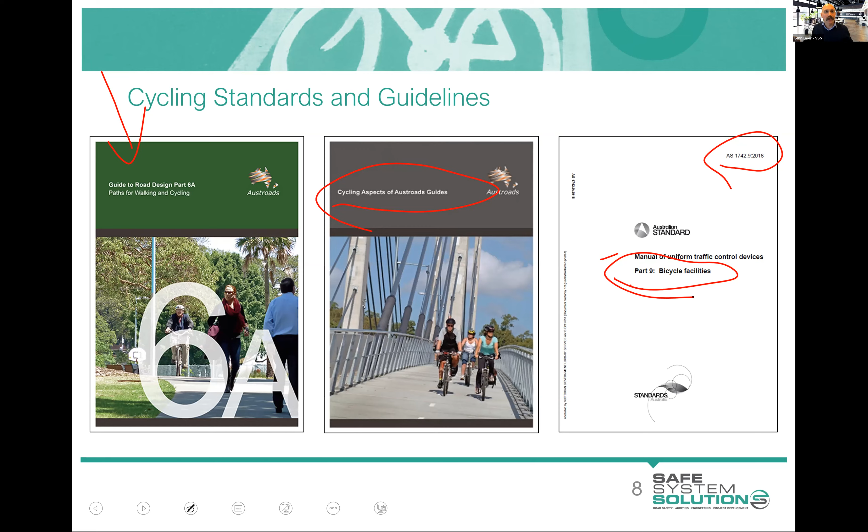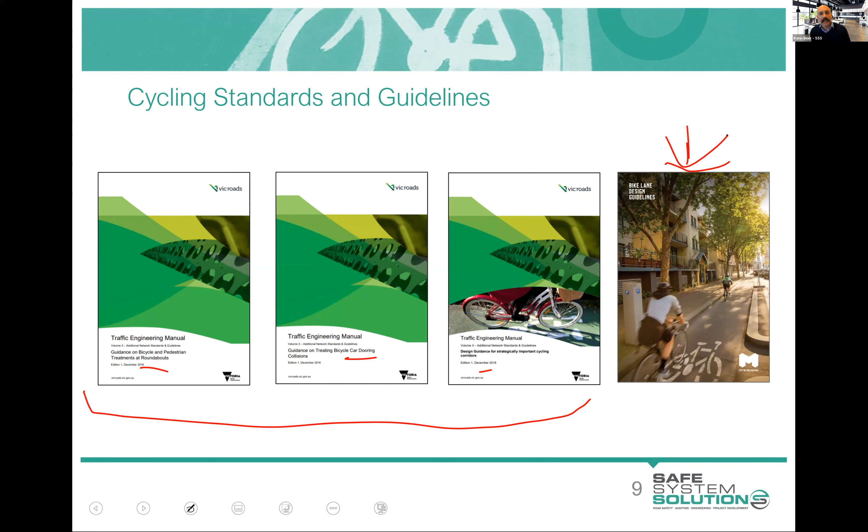Then there's a raft of supplementary documentation. Some of my colleagues wrote these three for the Victorian government: bicycle and pedestrian treatments at roundabouts, car dooring areas, and strategic cycling corridors. This is a nice new document, the bicycle lane design guide from the City of Melbourne. The New South Wales government has put out their bicycle lane design guide, which is pretty cool. It's got some nice artistic images, so that's worth a read as well.

We've got the CROW Manual, which is like the international Bible of cycling infrastructure, and a prize for the person who can tell me which country the CROW Manual is from. First one to pop that in.

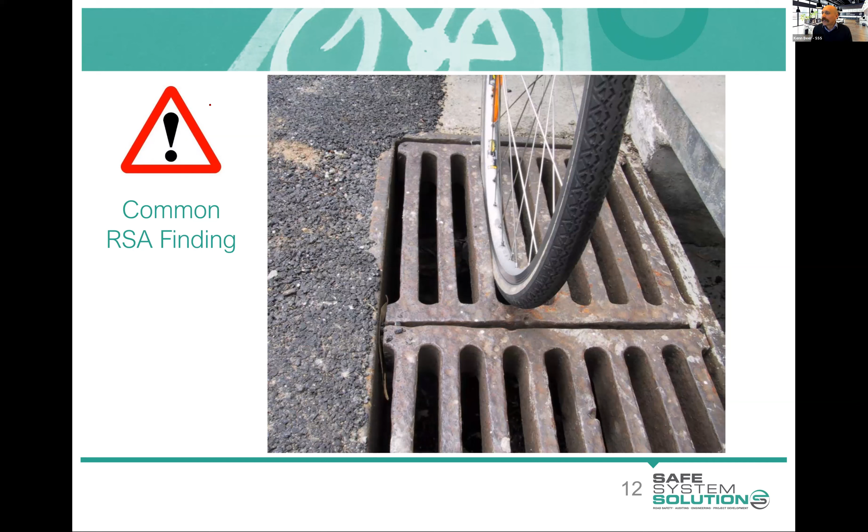Yeah, so each of those has been successful for the parties that have gone into the grate, and as expert witness I basically say, well, I run the road safety audit course and have been doing it for many years, and the first common audit issue I talk about for cyclists is longitudinal grates. It's 101. So hopefully you'll remember it, and when you're out on the road network or riding your bike, you'll be very aware of longitudinal grates. Small ones or even big ones like this, which will swallow up your tyre, no doubt.

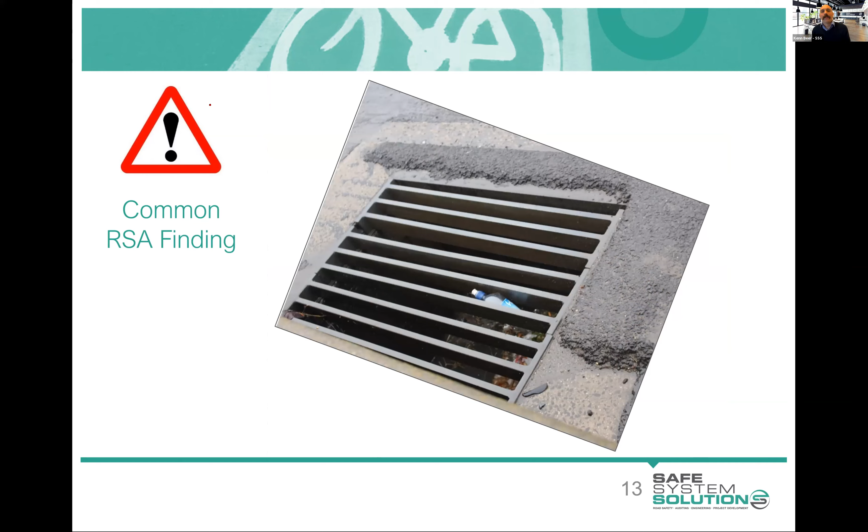Another common road safety audit finding, which is an interesting one: my team and I were doing an audit of some upgrades to this road, Sydney Road. They were planning lots of green bike markings, some threshold treatments, some bike boxes. A bike storage box is where you have the lane and the bikes can mingle out here to get in front, to store, and then off they go again.

This is a signalised intersection of Blyth Street, and when there's a green light here, cars turn out there, but there's also this left-in green arrow. And they're proposing a bike box in front of that one, which has the potential that cyclists come down, store in front, and then we've got the green left arrow, but the cyclists are wanting to go forward. So we've got this conflict happening there.

Now, as an auditor, that one becomes really hard to risk rate. I find it quite hard because I go, is it really going to be this crash, or is it going to be a road rage incident, or what's going to happen? In the end, I put it down to a lowish risk level. Luckily, these things get rectified pretty easily and quickly on a design like this. But it's hard to conjure up a scenario where that bike's sitting squarely in the middle of the lane, but somebody misses them and goes for their turn.

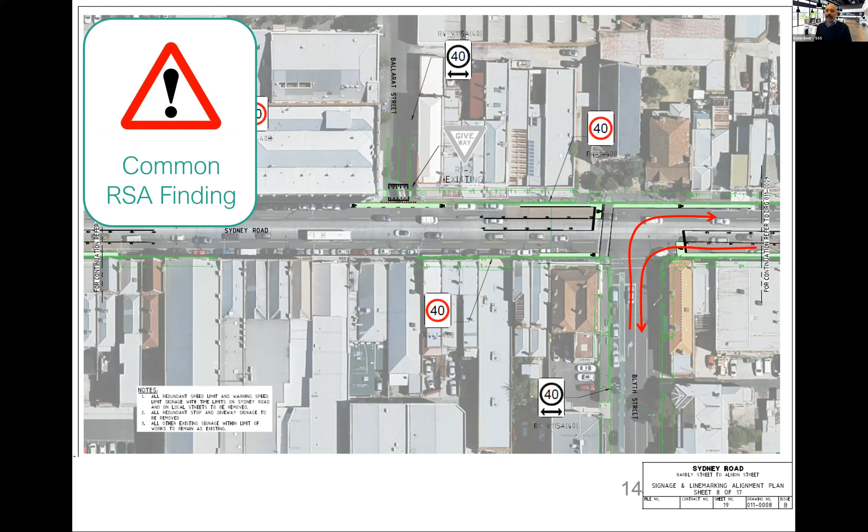Emma, how about you pop up a quiz there if you possibly can? Absolutely, yeah. There we go. Here it is. So just a couple of questions. Oh, actually, you're not going to have the answer for the second one, but we'll have a chat about it anyway.

I think I've jumped the gun on the poll. It's all right. It's all good fun. Yeah, absolutely. So I'll give you a second. And remember, you're not marked on this. This is just to keep you thinking and see if you are listening.

This also helps me work out how much background experience the group has with cycling infrastructure. So this has really worked out quite well. Lots of people putting their vote in. Now, if it hasn't popped up on your screen for some reason, I'll read it out to you.

Which of the following is not a common cyclist requirement in infrastructure? Separation, connectivity, cadence, or clear sight lines? What is the name for a shared lane arrow? A chevron, a sharrow, a sparrow, or a marrow?

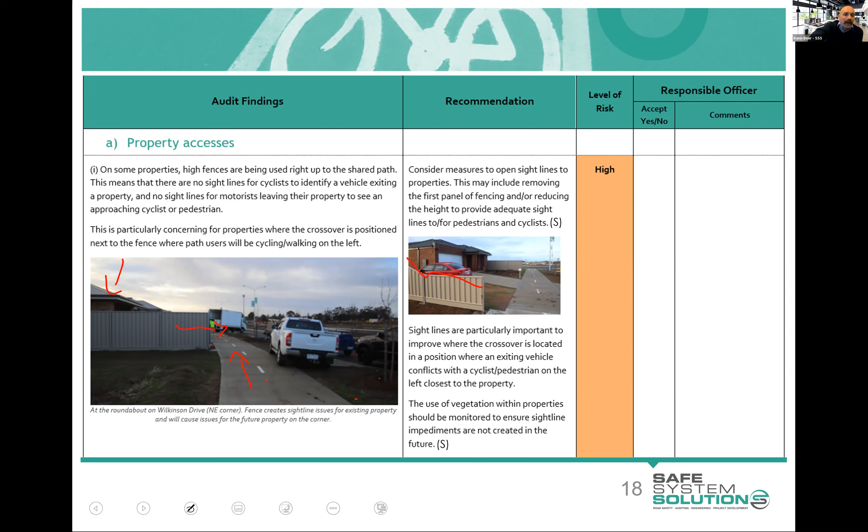So here's an audit a colleague and I were doing of a new shared path that was being put at the property boundary in a big new subdivision. And you can see there it's that issue of the high fence, particularly where the garages are right up against the high fence. So we're going to have cyclists coming down here, and cars backing out. And so then, some suggestions of dropping that down. We did at some points suggest that the shared path would have been better further away, but it was built and it was down to modifications.

So in our opinion, the safe system energy within this one was within tolerable. Now it's borderline, but if a car backs out and a cyclist hits the car, that initial impact is likely to be fairly survivable in terms of our energy tolerance levels. Under that 30 kilometres per hour, most likely.

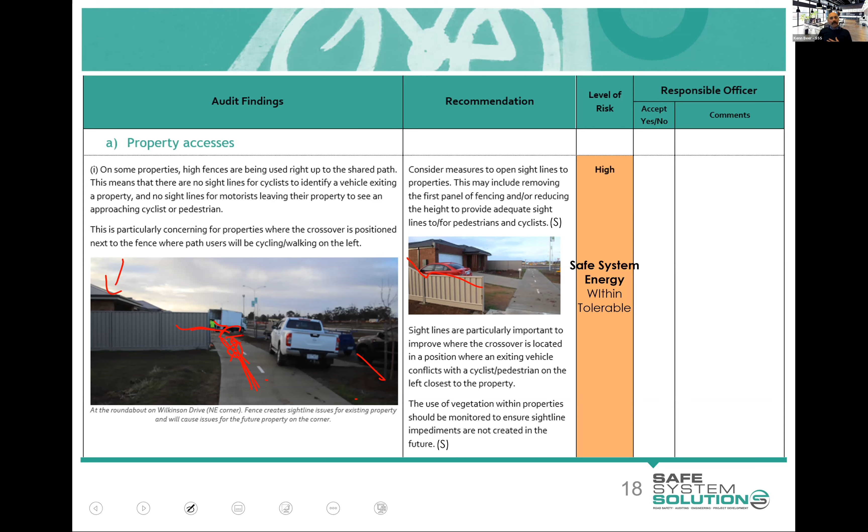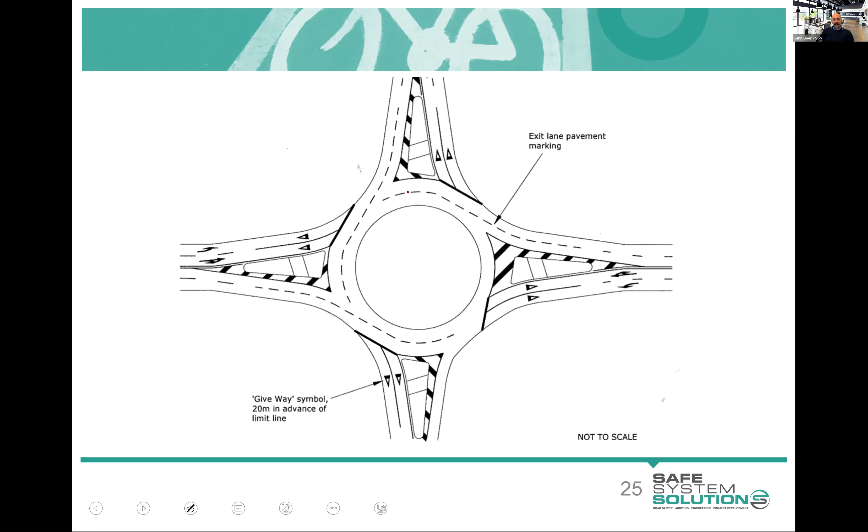2-lane roundabouts are an extremely challenging thing for getting cyclists through them. In the Netherlands, for example, they will grade separate. They will have an underpass for cyclists or elevate the roundabout. They aren't going to be putting a cyclist through a 2-lane roundabout for sure. Unfortunately, we have a lot of these and we have a lot of this interaction. But there's people coming up with some decent ideas for this sort of stuff. This idea of separating, as I mentioned, seems to be working quite well.

So, looks like there's a question come in there, Emma. Let me just try to catch up here. Yes. Are private property owners accommodating to road safety audit findings? Oh, good question. Well, they don't care. Usually a property owner's not too caring about what audits say. The road authority or the developer or whoever it is who's trying to build this facility that interacts with the road environment is the one that needs to work all of that out.

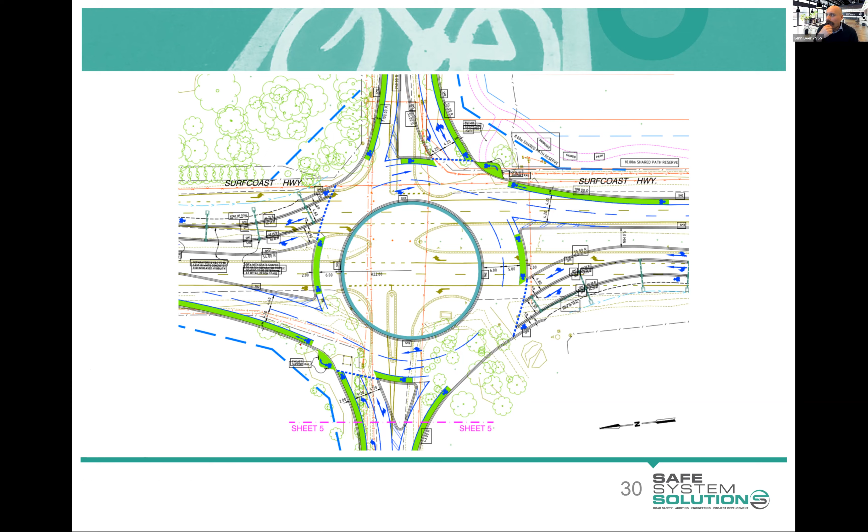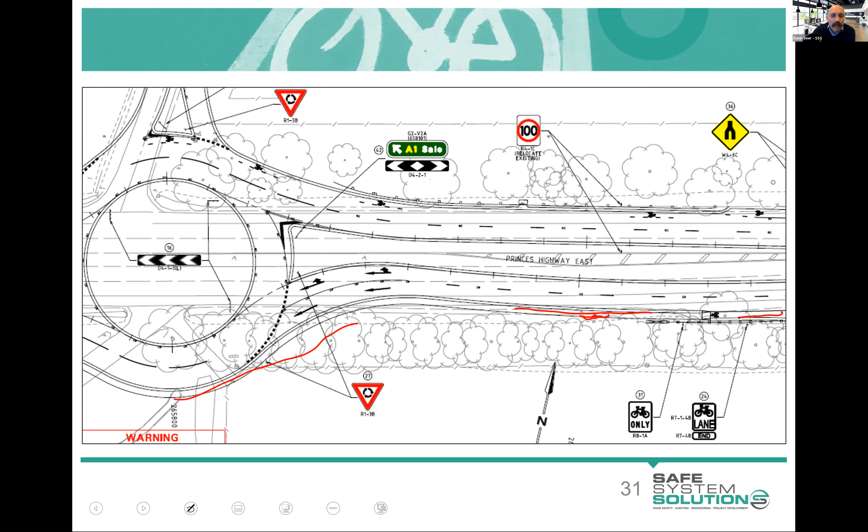As a cyclist, I think some of them might go, oh, well, that's where that ends for me, and off I go, and think that, oh, that looks like a footpath. Yeah, you've got a little cyclist only sign, may help. But I think the application of a small little bit of green there would just tell the story beautifully. And it'd be no extra cost in the scheme of this project. Like, as I say, it's like a $4.5 million roundabout. So here's an example of where a little bit of that has been used to try to guide you down to the place you want to go.

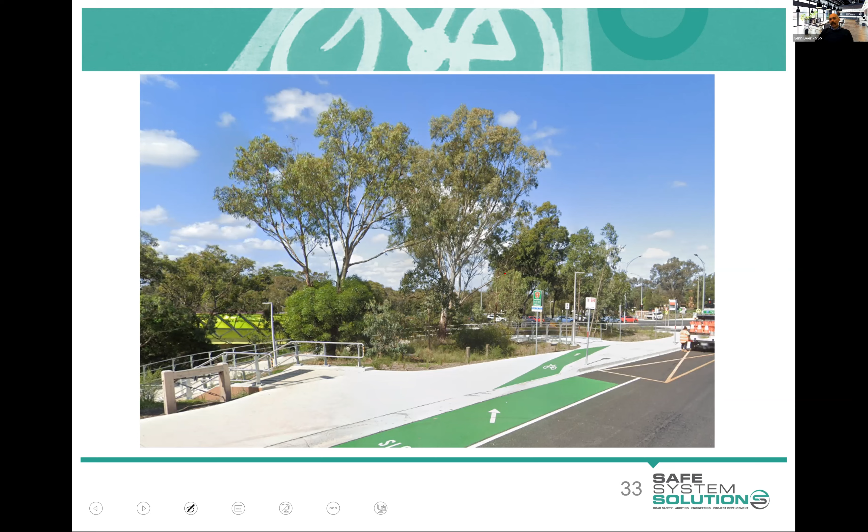Now, you're all attuned to this because you did your little desktop exercise that you've just finished on one of these, so you're seeing how they operate. But it's a pretty good facility. There's some challenges associated with sight lines of vehicles turning in. I like to make this sort of like a bluestone or something to slow a vehicle that's turning in. As a cyclist, to slow that vehicle so it doesn't make that fast move through. Green surface at the conflict points, as you can see.

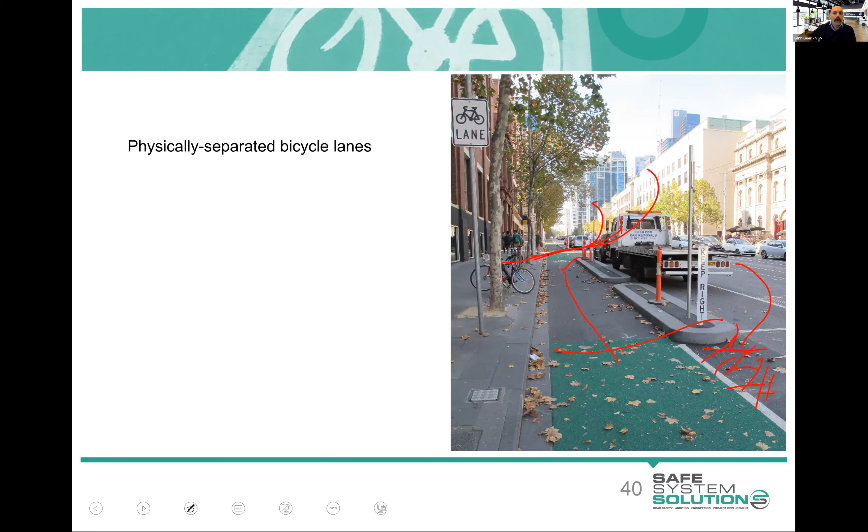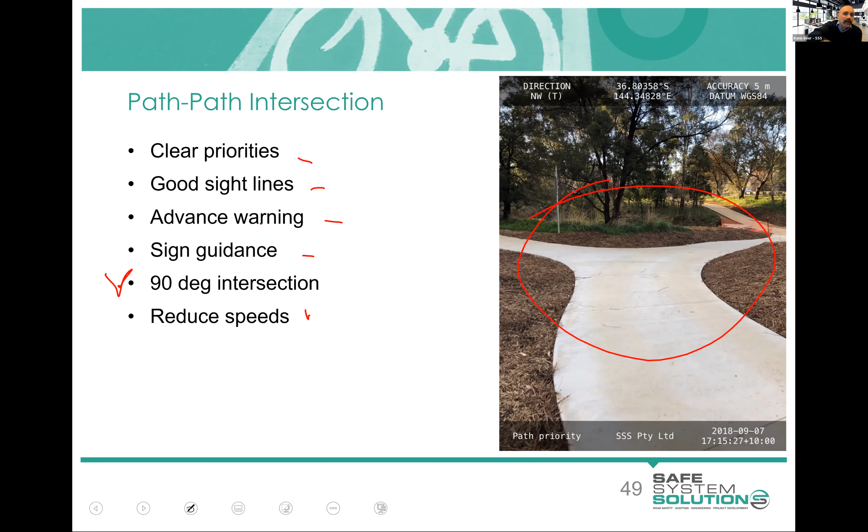Another one here, which I've got the aerial of: you've got one path going like this, and you've got this other path coming down here. It kind of looks like that one might have priority, or that one. If you're riding down here, is it my priority or is it this one? You'd probably think it's this one. It's actually this one, because that's the main route through. It's just all a little bit confusing, so you want to clarify that.

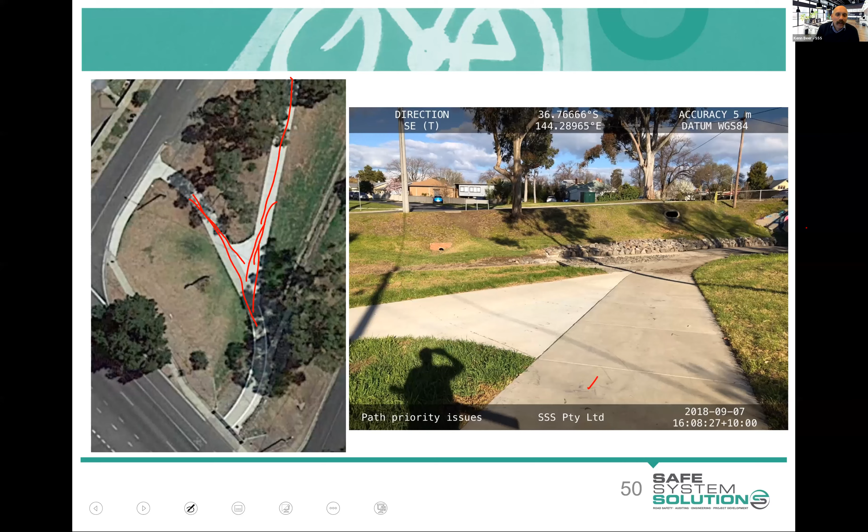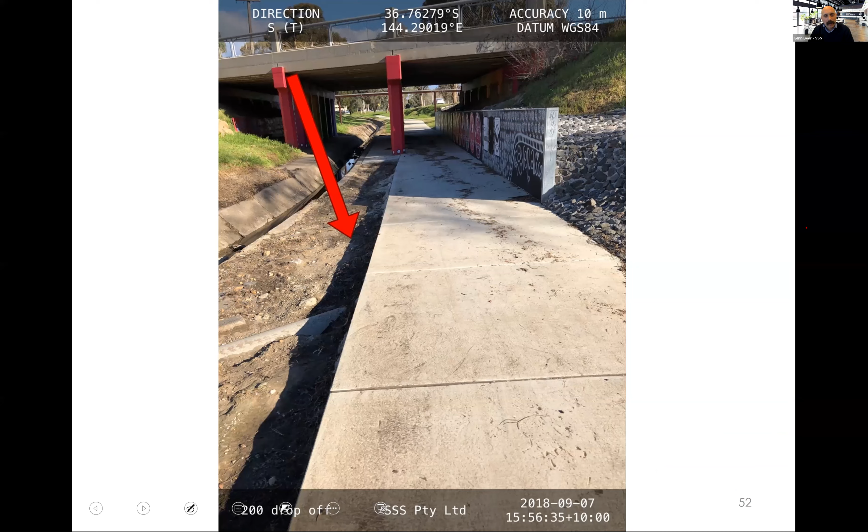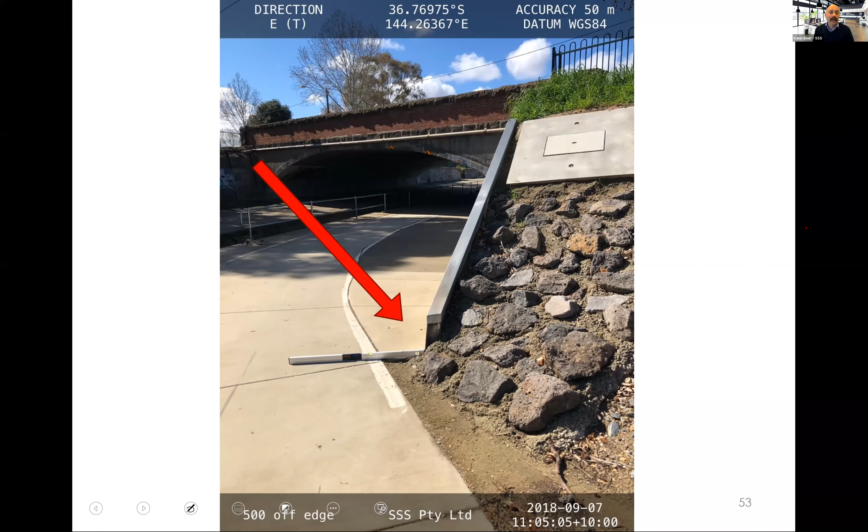Obviously, drop-offs are issues. That's a big, clear, obvious drop-off. But smaller drop-offs are enough to destabilize a rider and have them into the drain there. And even hazards close to the edge of the bike path. You might think that's off the path, but these paths get used by people walking, kids, dogs running out, all sorts of things. So the idea that a rider may have to avoid these things is very real. We have some guidance on distances you would like clear, a bit like a clear zone, really.

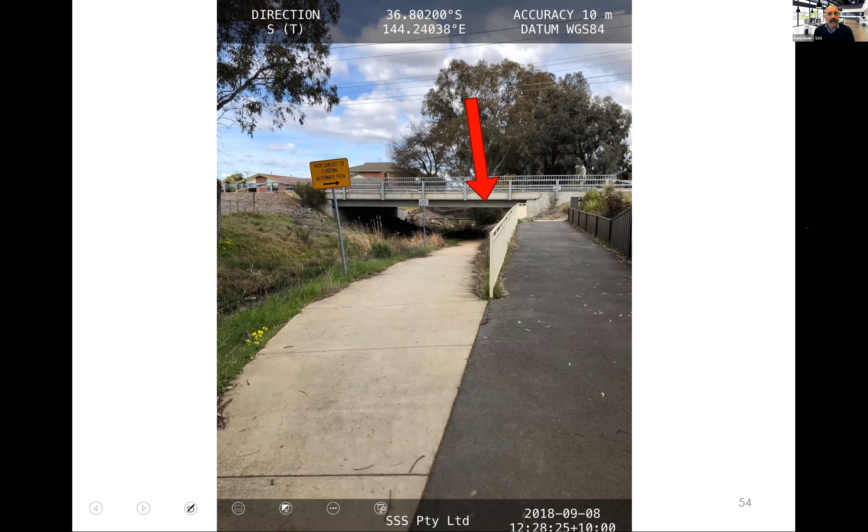And think about the path at night. Something like this looks good. I don't have the night photo, but there's no light around there. You won't see that at night, so if you are going to have things like that, make them retroreflective, ideally lit, or ideally have no hazards in those sorts of areas. Debris and gravel on the path can obviously be an issue. And cyclist fencing, fencing for cyclists.

There are particular fences designed to not snag a handlebar or a pedal. And this is not one of them. This will likely snag if a cyclist comes around there and drifts out a bit, or a dog jumps out. But these are the look of a designed cycle fence, and your local jurisdiction's got good guidance on what's accepted.

What else have we got? The back of guardrail posts is a significant issue for cyclists. Again, another one where councils have been successfully sued by injured parties. All good intentions, putting the barrier in, trying to protect either the vehicles from hitting the trees or the path users from errant vehicles, but cyclists hitting the back of those posts, you can imagine the damage that could cause. So have a look for that sort of stuff as well.

You can back-to-back your guardrail if you want. There is post capping available; you put caps on top of them. So that's a pretty nice one. That is a cyclist-friendly fence, and back-to-back there on your W-beam.

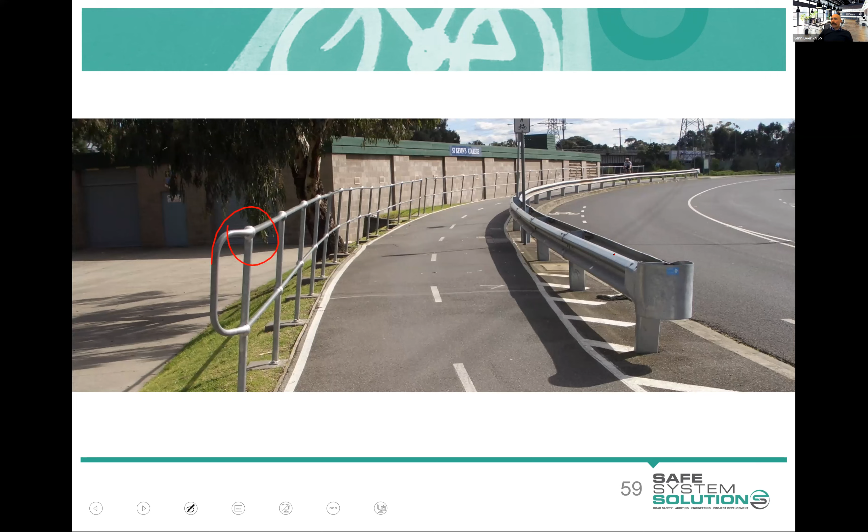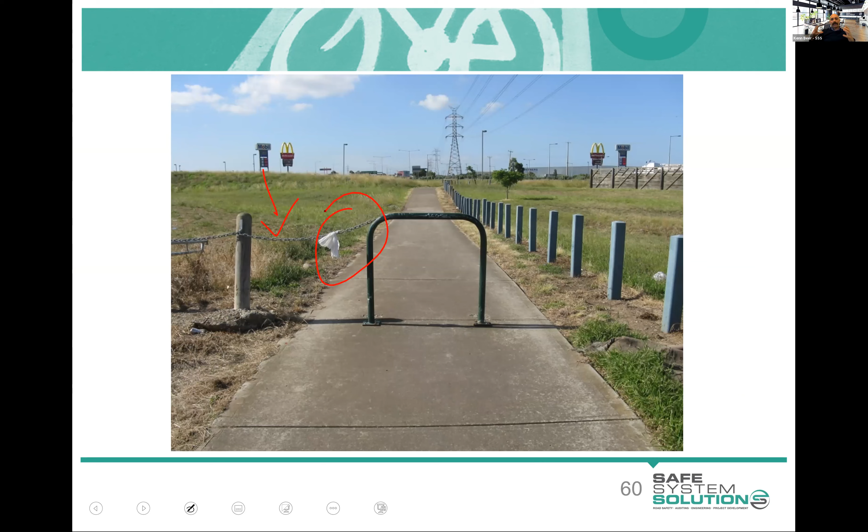Yeah, think about these obstructions in the path. Again, this one at night, very hard to see. In fact, so much so that whoever's put the chain there, I think somebody's tied that around it to warn other cyclists at night that there's a chain across their path. So it's again people coming at it from the view of, okay, I've got to stop vehicles getting into this area, and so they've done it like this, but we've got to think about the safety of other road users.

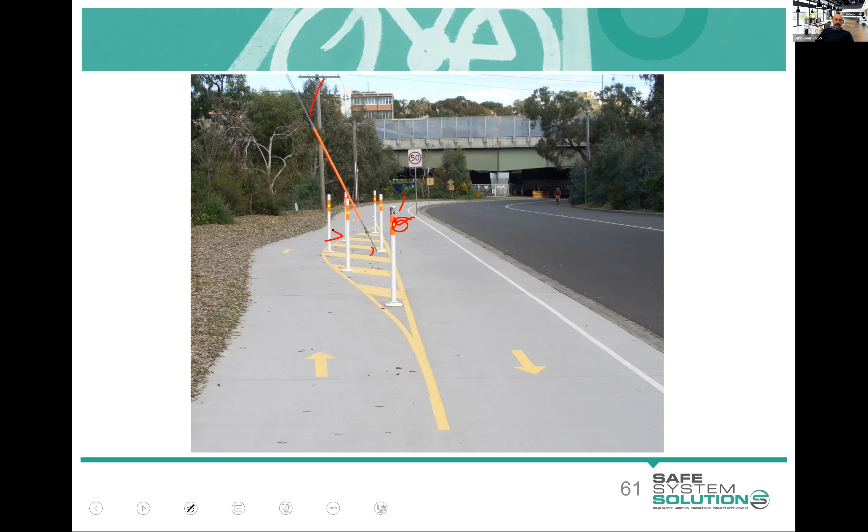some buffered area. They've got flexible bollards. These are flexible bollards. They're retroreflective and it's well delineated. So it's a decent retrofit. Ideally, we wouldn't have the issue, but yeah.

So there are these things called thematic audits, which are cycling-specific audits. And it's really basically you're going to ride the route and you're looking directly for issues for cyclists, and you do these a lot on shared path facilities or new bike stuff. So what I've done is put a fact sheet in there that we've put together on just some of the specifics associated with that that might be a little bit different.

I mean, you're generally following the same audit process. You're just doing it from on a bike and you're looking specifically through that lens. So have a flick through that if you want. It's on your USB and in Moodle. So, questions on cyclists before I jump into our other two-wheeled friends.

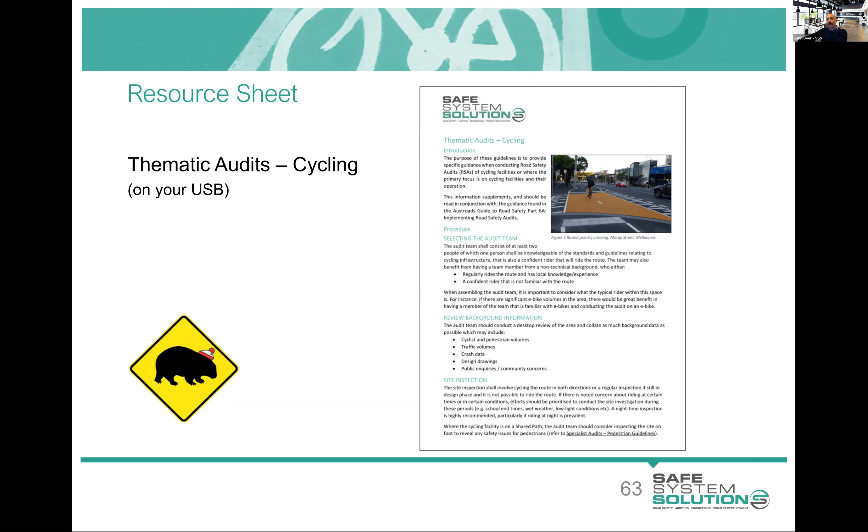Doesn't seem to be. Should we just take a little break, Ken? Just give everyone a stretch of their legs. I think that's a great idea, Emma. Okay. It's right on half time too. Yeah. So we'll get out the oranges and you can have your halftime orange and stretch. Perfect. Oh, wait, we do have a question.

Yeah. We will answer. Is there guidance on commuter cycle routes compared to recreational? No, not really. In terms of managing design speed on SUPs. Oh yeah, okay, on shared use paths. So no, there's really not great guidance on that. I mean, I dare say that a shared use path as a training facility is not a great thing.

And there has been some stuff on recreational cycling routes with things like active warning signs. So as a cyclist goes by, a warning sign will activate for a certain period of time. So especially over a windy, hilly bit where the real MAMILs like to get out there and do their training rides up the mountains. But of course, that's the area where there's no overtaking and it's tight lanes. And so the drivers are coming around there, and then it's dark,

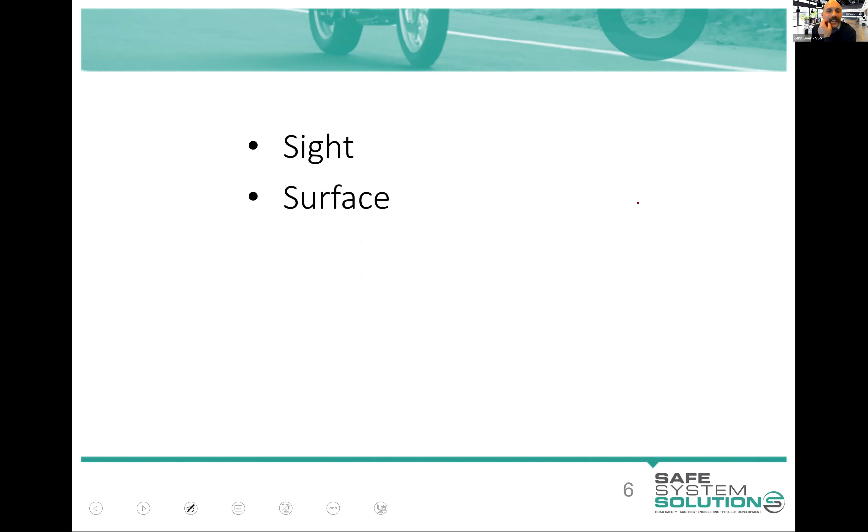Sight, surface, signs, strike, speed. These are just the 5 S's I like to use when I'm auditing to think about riders. Can the rider be seen? And can the rider see what's coming up? How's the surface for the rider? Are there appropriate warning signs, information signs? What is the rider going to hit when they're off the bike? S, the strike. I had to make it an S. And speed. What's the travel speed of the rider? What's the travel speed of the cars that may hit the rider?

And when you look at those things into our risk portfolio, first one to type in what the definition of risk is. Risk is something times something. Nick has had a win. Likelihood times consequence. So likelihood times consequence, or probability times consequence, or probability times severity.

I asked that in the first module. Hey, well, I'm glad you're listening, Nick. That's worthy of a prize for being able to repeat what came out of the first module.

I think so. And it's a pretty important thing to understand for your risk rating in your road safety audit, isn't it? Because we don't want you to just arbitrarily grab a risk rating. We want you to go, what's the likelihood? What's the severity? What's the probability? What's the consequence? Use your matrix on that point.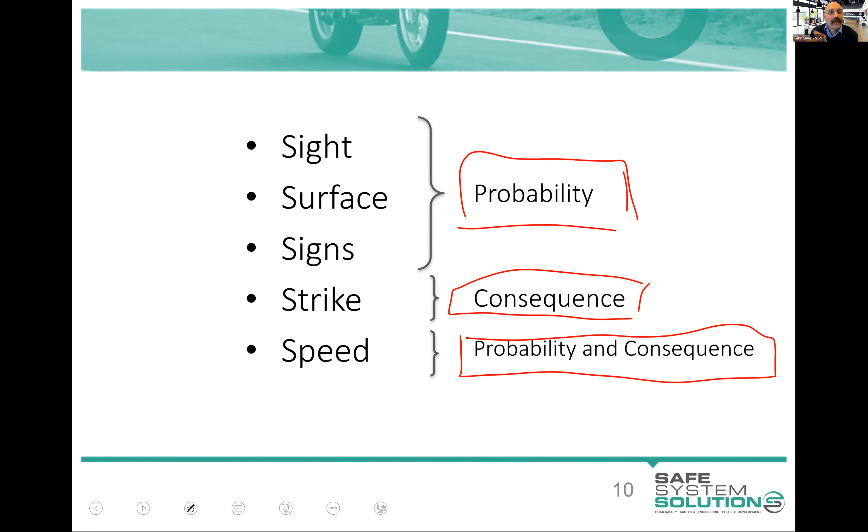So I will just touch on these quite briefly because I want to leave enough time to talk you through your audit requirement. Sight. Okay, motorcyclists are smaller than cars, even small cars. Interestingly, usually eye height's a little higher than most cars. It doesn't play out too much in audits, but it's an interesting thing to note.

Interesting, we've got these safety margins that we allow for when we're thinking about motorcyclists. Why would we have these safety margins? Somebody pop that in. Duncan, you don't get a prize for this one because you spend too much of your life thinking about this stuff. So any ideas why we've got these safety margins on the sides of the bike?

Okay, so that's a good guess that came in there. Every rider rides differently and wind impacts possibly as well, so it could be different lines. It's not actually the reason it's there, but I like it. The one that's coming from Duncan, I am going to ignore because it's correct, or it's the reason it's there, but Duncan doesn't get a prize. Lean angle, which Nick has popped in, is correct. So as a rider takes a curve, there's a lean, and we add a safety margin for that lean allowance.

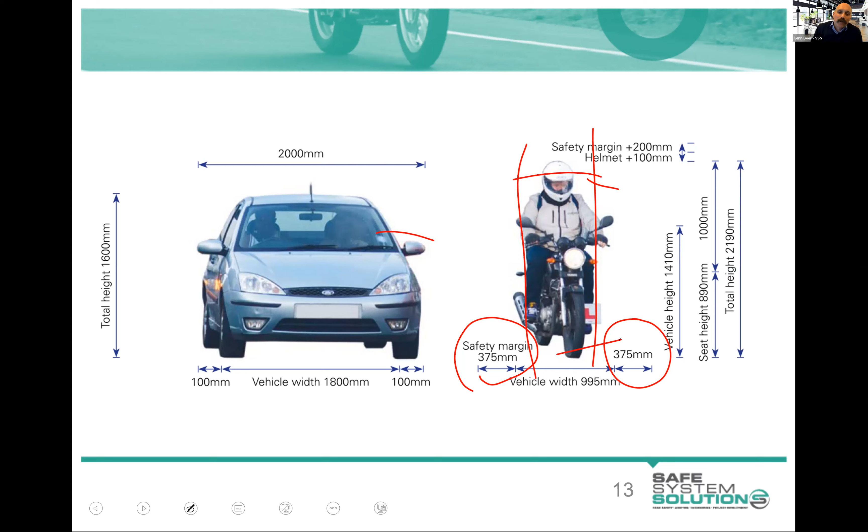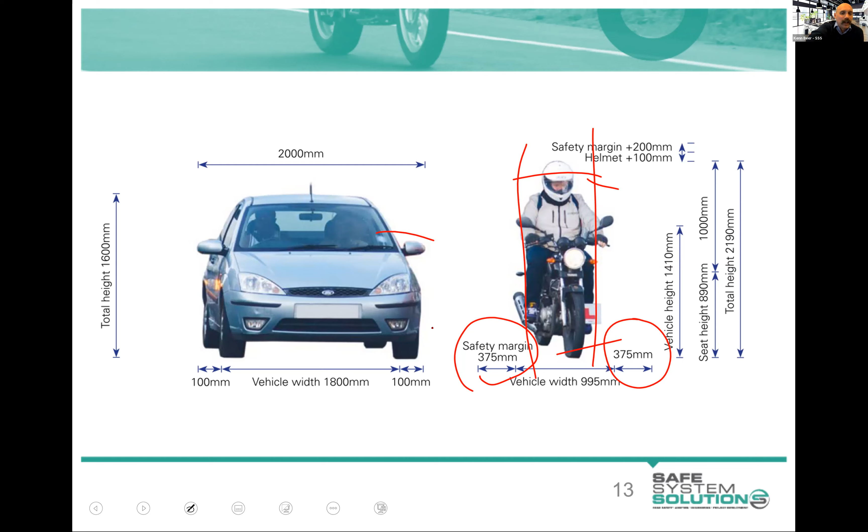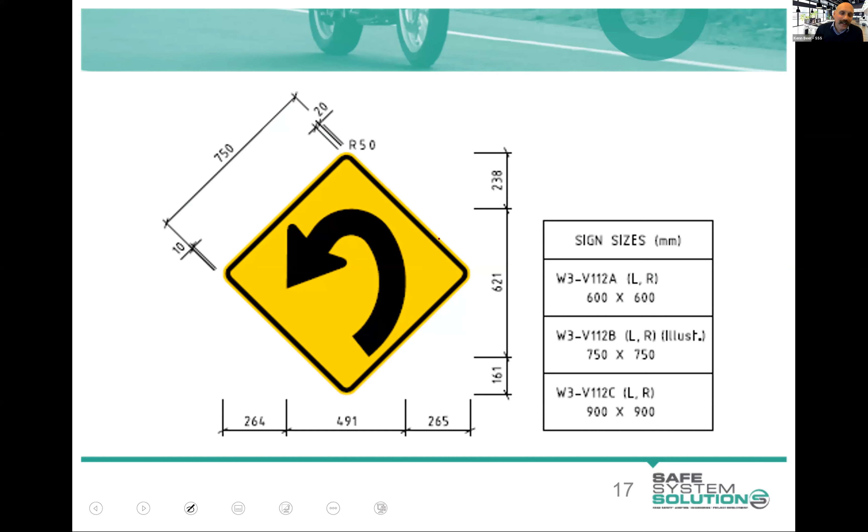So, it's got one radius here, and then it's got a second radius in here, and the tightening of it is a real challenge for a motorcycle rider because they're likely to set themselves a line and a speed based on what they're seeing coming in here. Sure, they'll take a little bit of cue and guidance from any advisory speed signs and the like, but they're very heavily influenced by that. And if it tightens up on them, really they have almost no chance but to go onto the other side of the road if they are set in how they're going.

Now, I will give a prize for the person who can tell me the official term for that type of curve. Actually, Chris has come through with the goods. Compound curve. It is a compound curve. Nick's called it a spiral, which is a more colloquial term for it, as would be a double radius curve. But a compound curve is the one. So Chris, good stuff. Chris is probably a road designer. Maybe, I forget. I have to reread your profile.

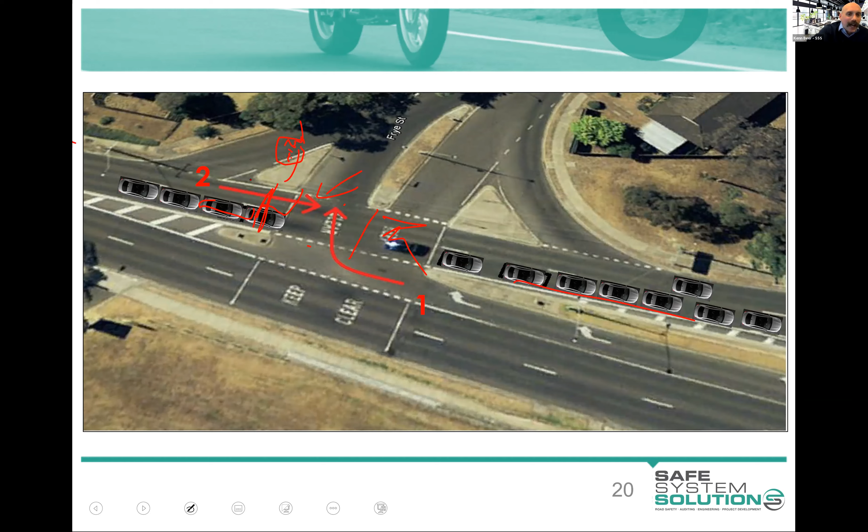Signage, warning signs. You could even do things to slow down this area. You could link signals. So you could actually put a set of signals here, even drop-off signals, just a red and an orange, so that once the queues bank up, this goes red and you can't actually do that, so they can clear the traffic through. Lots of little options there. How am I going on time?

So the surface is an important one, and we call motorcyclists the canary in the coal mine when it comes to surface issues. They're the first ones to be killed or seriously injured when surfaces go bad. Duncan rightly pointed out the lean, the center of gravity, the small contact patches, so if there's a surface issue, the rider could slip out. So especially where riders are on a lean or in their braking zone, it's really important to ensure that we've warned or we've fixed the surface issue.

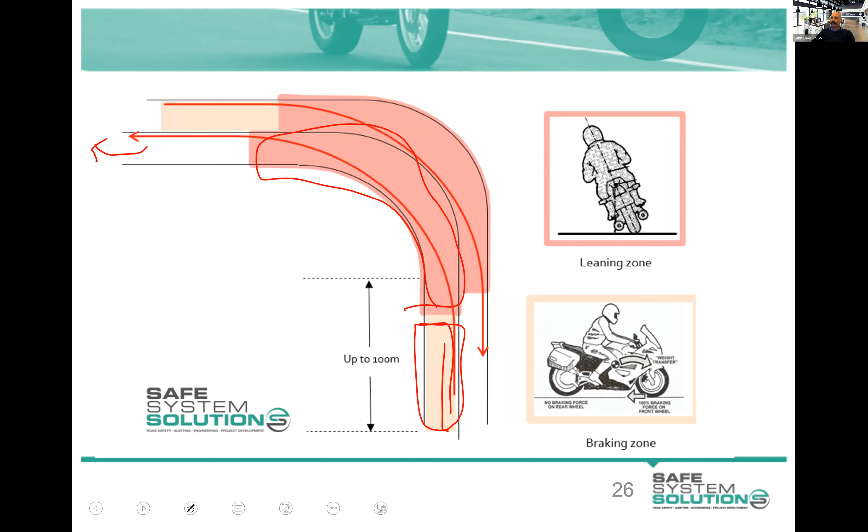Here's a diagram I have to replace because Duncan rightly scolded me for the lines that we've drawn for the motorcyclists. But the principle is that through the curve and on the approach are the most important areas for surface. As the rider comes out of it, it's still important, but less important when the rider's upright and unlikely to do braking maneuvers. So a nice, consistent, good skid-resistant surface like this, which is like all roads in Australia and New Zealand. Am I right? No, unfortunately not.

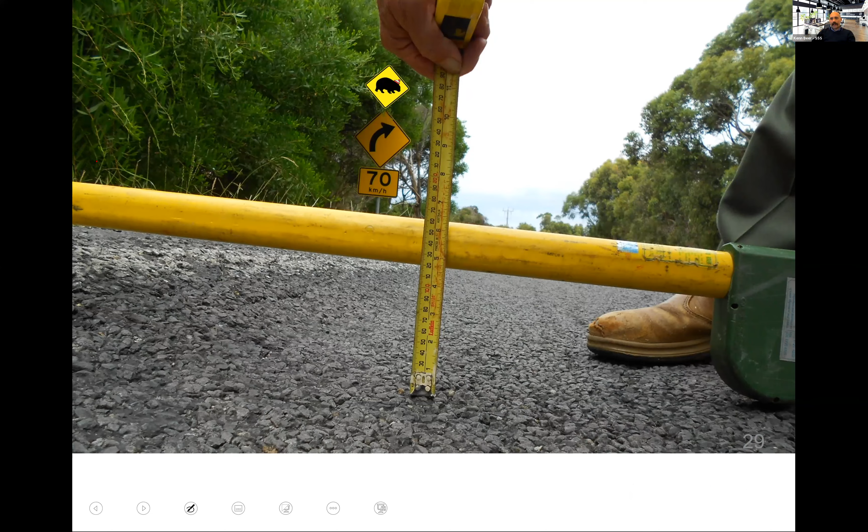We have depressions in the road. We usually measure those under a 2 meter straight edge, and you measure how much of a dip is in different parts of the road. As a rider's coming around a curve, if they hit that, it'll destabilize the rider and they lose traction. Obviously, potholes are bad, and any sort of pavement changes or deformation, especially around curves.

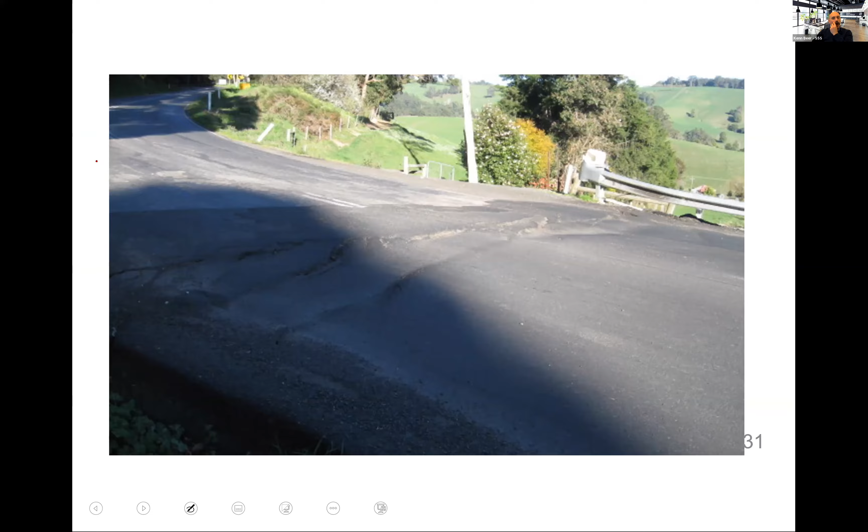Gravel, debris from work sites. So if you're doing a construction site audit, you want to be thinking, have they swept the site? Have they got wheel washers, so mud and debris is not coming out onto the road where a rider could slip? Cyclists are very susceptible to this as well.

And thinking about how we do patching and where seams are in the surface. So we often see patching where we get the seam of the patch right in the riding line of the rider, and sometimes it'll break up around that. So it'll be quite a challenge.

This is a sort of classic example on a very popular motorcycle route up in the Yarra Ranges. Quite a curve, and there's sightline impediments, and a rider coming around here is fairly locked into their line, and they see this, and really the option to go inside this is not there. Physics does not allow. So the option is either to go outside it, potentially onto the wrong side of the road, or pull the bike upright, which is going to mean that the line then starts to take them onto the wrong side of the road.

So ideally we get these right in the first place, but if not, the warning of something like this is so critical. A warning, hazard ahead, and all that.

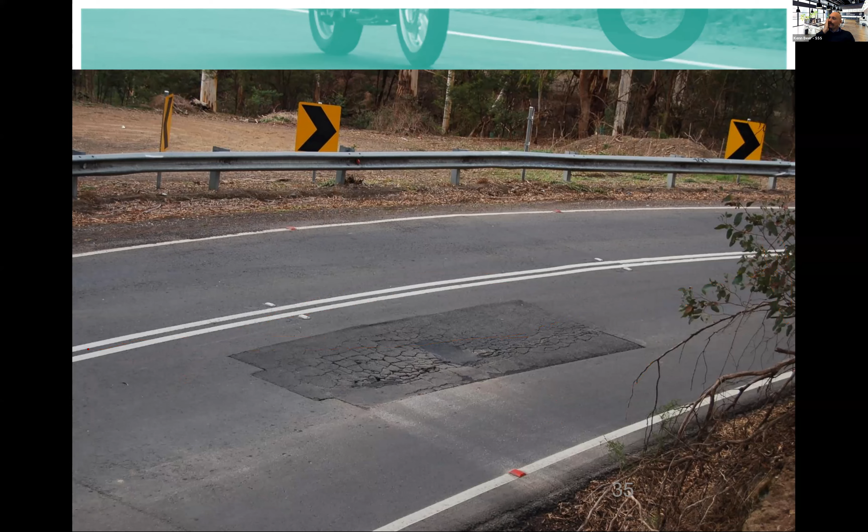Duncan, remind me, is this you as well? Pretty sure it is. The surf, yes, it is.

So we can provide these skid-resistant surfaces. We can colour them up. Ideally, we don't have these in the road. And you can actually influence that from the design stage. So if you're identifying pits or services in the carriageway, maybe they're building a new roundabout.

This is a classic. They'll go, oh, we're moving the services, let's just put the pit in the middle of the carriageway, right? Well, that's going to cause trouble at some point. Move your services out, and we don't have this issue. There you go, roundabout and service right in the middle of it. Not a great spot at all.

Skid resistant surfaces, so we can water blast. We can get better skid resistance through water blasting or different ways to do that. And it's just going to make the likelihood of crashes less for riders because they can react, they can brake, as can cars as well.

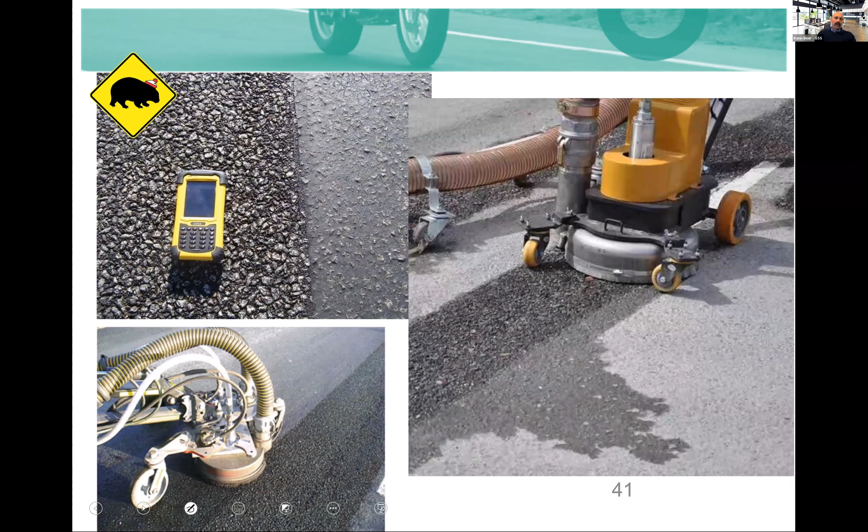And you want to try and do really good skid resistant surfaces in the areas of highest risk. The approach to the intersection, through the intersection where a rider will need to take evasive action or maybe slam on the brakes really hard. But once they're out, the risk goes down.

And barriers. No, actually, I'm not going to go to barriers yet. I'm going to go to unsealed shoulders or sealed shoulders. Sealing all the way up to barriers is a really good thing. The more sealed area we have as a run out area for a rider, the better. If they hit gravel, they're kind of pulling the bike upright and crashing. But if they've got a bit more, they can take that as a little bit of buffered area.

Curbing, the more mountable the curbing, the better for a rider. So a fully mountable curb is best. Barrier curbs will destabilize a rider. So we've got mountable, semi-mountable, and barrier curbs as different curbing types.

If you can, obviously your drainage requirements sometimes dictate the curb type that you need. You might need a barrier curb for drainage purposes and the like, but be aware of that. It is good to try to make it stand out from the road around it if you possibly can.

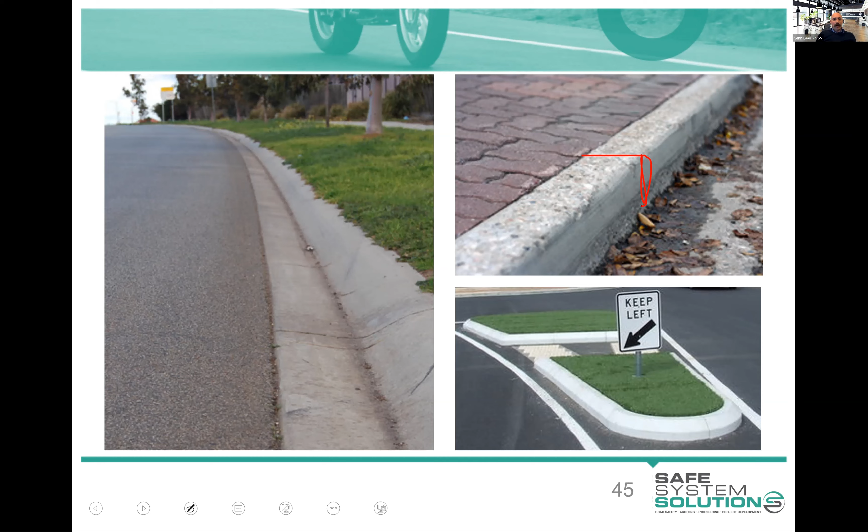And just to highlight how small a lip can destabilize a rider, I'll play this little video now. Actually, sorry, I'm going to mute it because apart from the fact that it's really loud, it also has some colourful language.

So here we go. Motorcyclist coming up, and there you go, a small lip, and you can see that destabilizes the rider. They're off the road quickly, and they collide there with, well,

if somebody can tell me what they collided with, I'll give them a prize too. I'm on a prize giving spree.

There you go. Small lip, clip the lip, and crash results.

That one wasn't Duncan, by the way. So Karen's saying it sort of looks like a bollard of some description. It is sort of a bollard, but Sam's going to get the prize because it's a cyclist rest bar or a grab bar. And it's basically where you have a cycling path crossing a road. You provide something so the cyclist doesn't need to unclip.

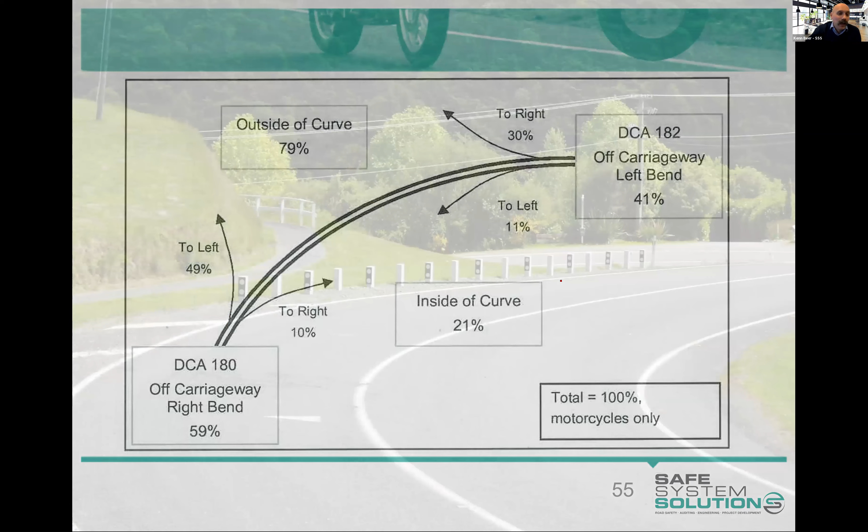So here's a bit of the Coromandel Loop in New Zealand, really super popular motorcycle area. We've got some surface issues and we've got these hazards on the outside of the curve, and they're concrete blocks. I think it'll be bad for everybody, but you know, that's not a great spot and not a great treatment on the outside of the curve. Every one of these galvanized steel poles is a strike hazard for a motorcyclist.

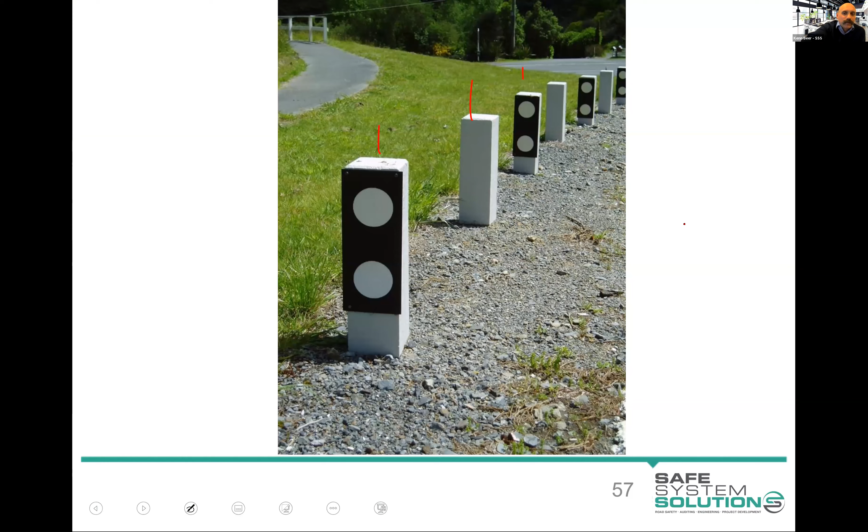And I'll tell you now, strong enough to kill a motorcyclist. If a motorcyclist is sliding and they hit that galvanized steel pole, that is strong enough to kill them. We call them frangible. We call them breakaway in the industry, don't we? That's for cars. So you're going to have to think about this.

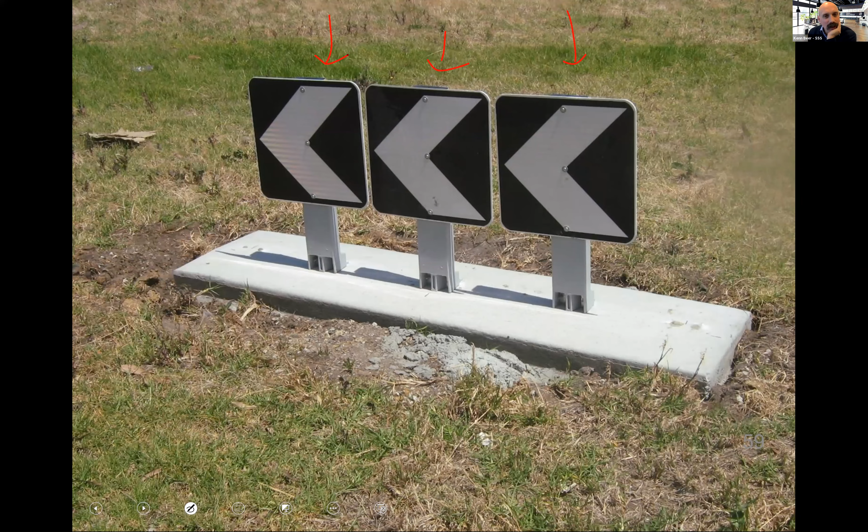Think about your placement of road furniture. A rider is on a lean as they go around the curve, so you don't want to go too close. That, in my mind, will be taken out by a truck before a motorcyclist hits it, but nonetheless. Here's a staged picture of a motorcyclist leaning around a bit of a corner.

And of course, we use barriers to protect road users from strike hazards, and barriers are very specifically designed for cars and sometimes trucks, not for motorcycles. And I'll summarise like 10 years' worth of research out of the University of New South Wales from Raph Grzebieta and Mike Bambach on motorcyclists and barriers.

There is a lot of research into this, but about half the riders are off the bike sliding and they hit the bottom. The other half are trying to stay on the bike and they hit the barrier and they go over the top really quick. Motorcyclists aren't running along the barrier like a vehicle would. So what can we do about that?

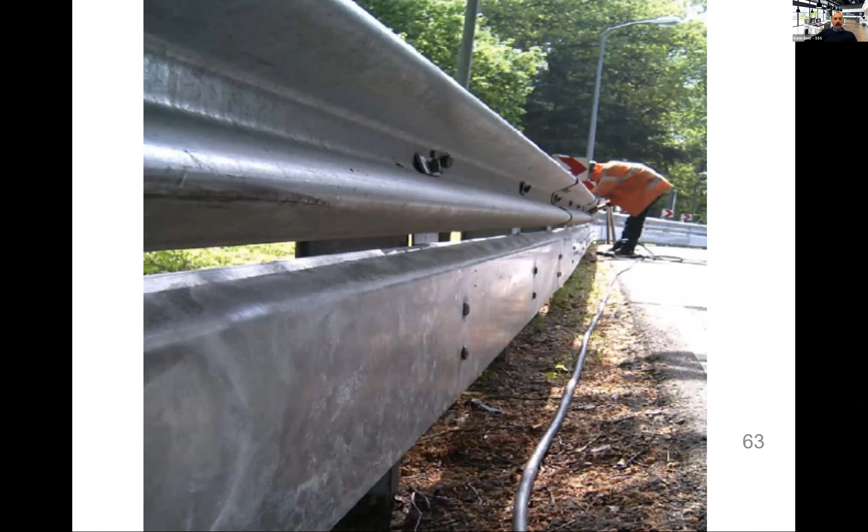Well, certainly for the bottom, for a W-beam system, we can provide underrun protection. Now, the public domain version of it is called rub rail, but there's lots of other proprietary ones. But it's basically something that you could be sliding along as a rider.

So if you were off your bike as a rider, or Duncan or John are off their bike and something's happened and they're sliding along at 70 kilometers an hour, they would not want to hit this. Now, they wouldn't want to hit this either, but it's going to be much friendlier. So they will hit and slide along.

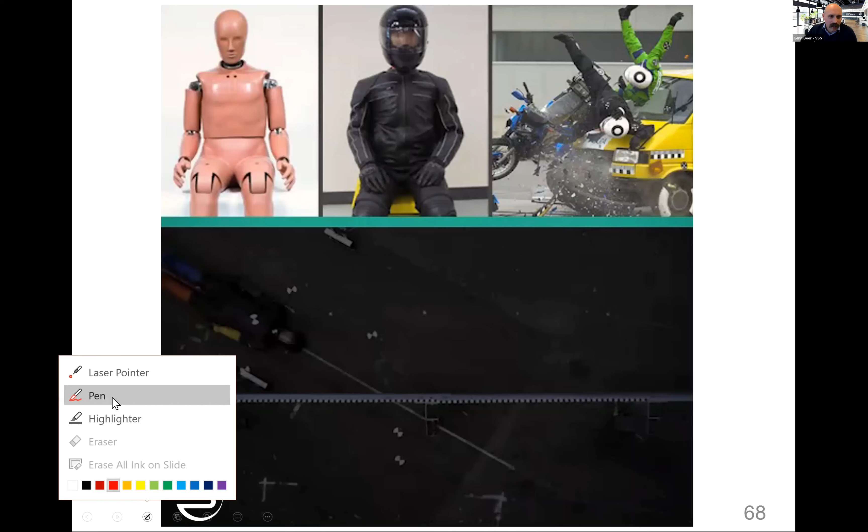So you can retrofit underrun protection to most W-beam systems. There's a bit of retrofitting as we go. And there's a European crash test for motorcycles. And this will give you an indication of the forces that motorcycle riders are subject to. So here's your crash test dummy kitted up with motorcycle gear.

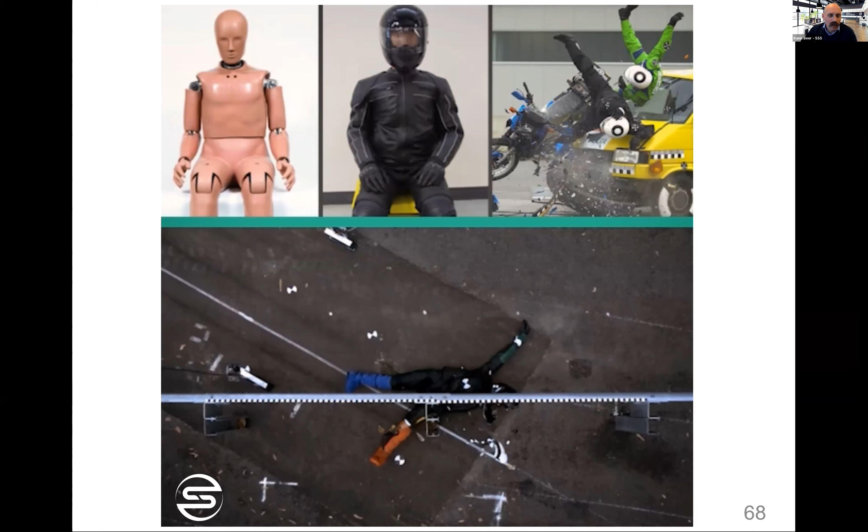You fire it at 60 kilometers an hour, sliding into the post, is test one. And there you go. You can see with the underrun protection, there's some energy absorption, deflection of energy, and it's much less severe for the rider. So that passes at 60 kilometers an hour. There's that bit of deflection, which is important, and the redirection of energy.

I've just had a comment, Ken, so I've just lost my place, that someone's just made: we've had to make a provision re rub rails and wildlife being caught at night by the rub rail when trying to cross the road. So perhaps a provision consideration for wildlife in the area. Yeah, good point. Good question.

Certainly we had to cut some little wombat holes, wombat entry points, on the Great Ocean Road when we were putting them in for exactly that reason. The wombats were crossing and then just wandering up and down the barrier. So they're the main ones that have trouble. The kangaroos and stuff just jump over the barrier, not a worry. So good point, thank you.

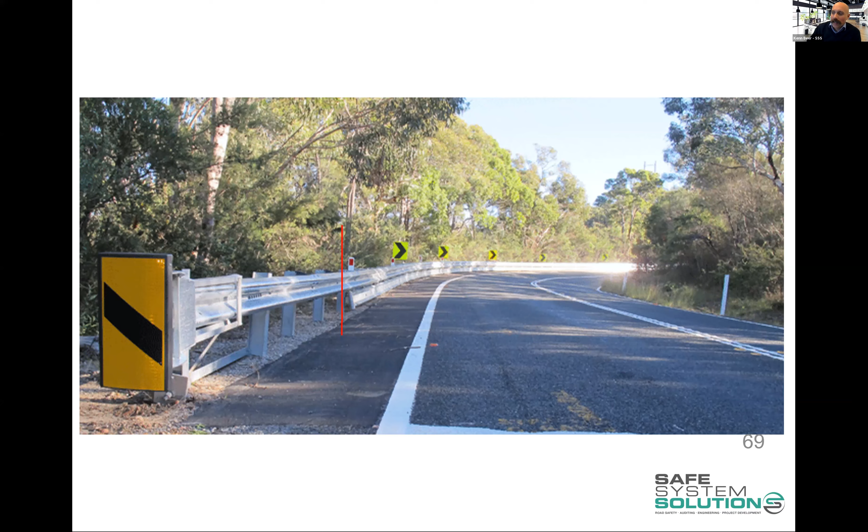Oh, this one just quickly, and I'm probably going to have to end this very shortly. Why have we not put underrun protection up all the way to the end? Why did we stop it there? Chris has got that one, and Archimore has got it in as well: it is the Great Terminal. So that's a gating redirective energy absorbing terminal.

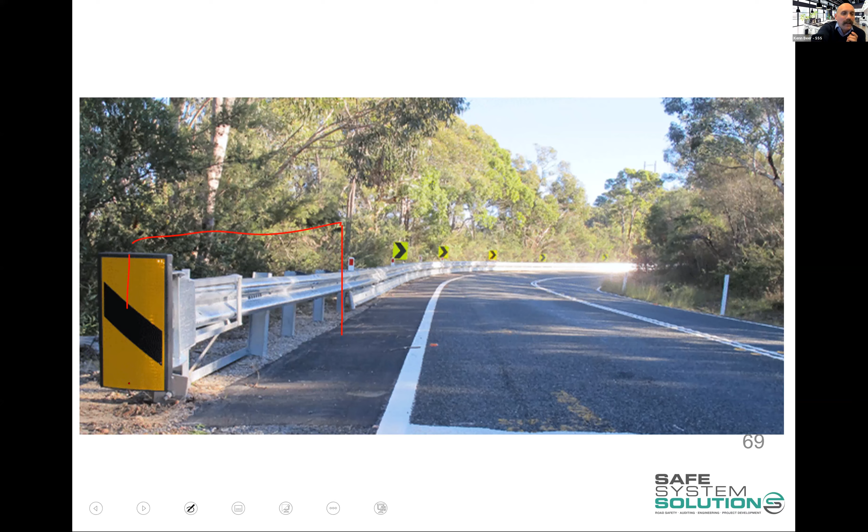That is specifically designed, and it's quite intricate as to how it works. And nobody has tested and designed anything with a connection under it like that, of steel connected to the posts. So you can't put underrun protection on a Great Terminal connecting to it. If you as an auditor see that, that's going to be a risk for other road users, because if they hit that, it may not function and it may spear them, or it may not come out the way it should.

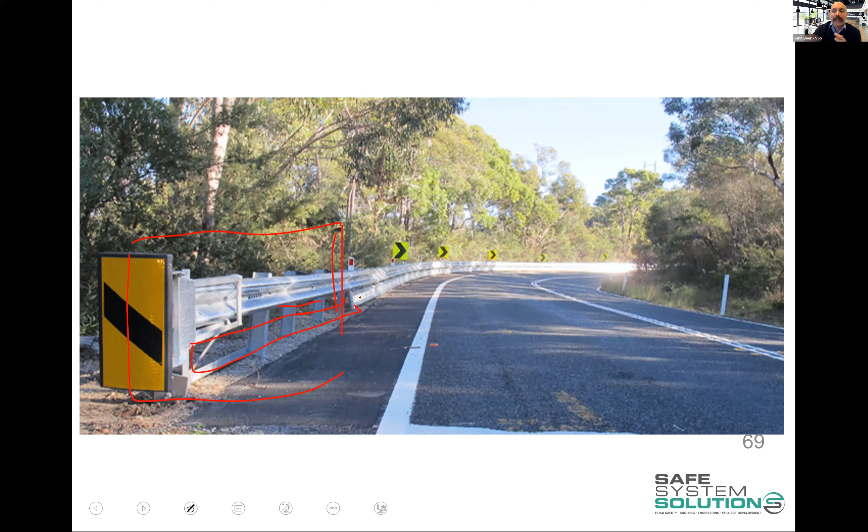Wire rope safety barriers. So often the big thing people say is, oh, what about wire rope barriers for motorcyclists, the cheese cutter. And the research and evidence say that motorcyclists hit the post, or they hit the barrier and they go over the top, just the same as other barriers. The one bit of that I'm sympathetic towards is that we really haven't come up with a great protection device for wire rope systems for motorcyclists.

But then again, they're not used on motorcycle routes, touring routes, for example, with windy areas, because you can't put a wire rope system on a very tight radius curve. A 200 radius curve is your absolute minimum, because if the curve's like that and you tension it up, which you tension these, you're going to pop the damn thing into the middle of the road. And you see that. If you actually put a wire rope on a 200 radius curve and you tension it up, the posts start to bend. They want to go. So we don't do it. And so it's on long straights, which is a very low risk for motorcycles.

But in some scenarios, if you're basically at the point where you're saying, I want to do something about it, I recommend you change barrier type, go to a flexible W-beam with underarm protection. We used to use these things, which are stack cushions, cushions around the posts. They're the equivalent of goalpost padding. These are not as effective. They're going to do something, but it's not effective. Nobody's tested them. It was more just, well, we don't have anything better.

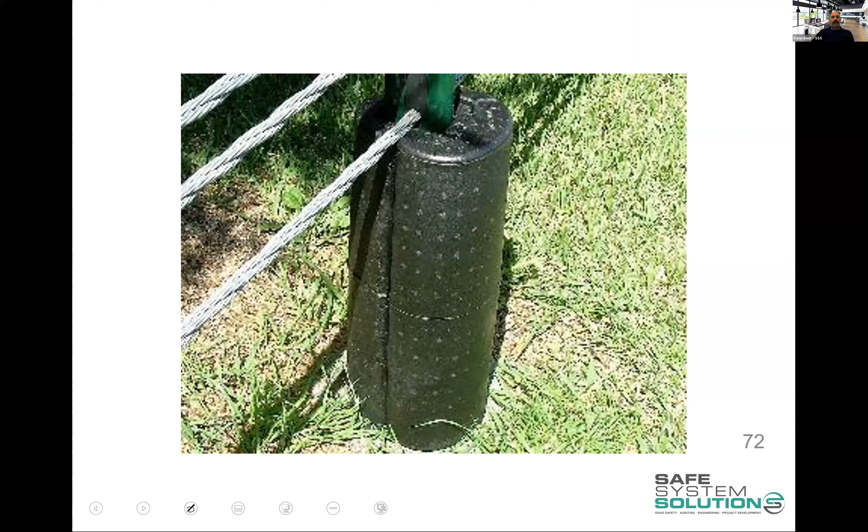But you're trying to absorb energy. So a rider sliding along that is going to hit it, and you're trying to absorb energy over this little area, right? As opposed to the underarm protection, which absorbs a bit and then redirects the energy. So that's what we want. But we can't do that because nobody's designed a wire rope system with that underarm.

But here's one that went in and the auditors were concerned. It's on the South Gippsland Highway, the main route down to the Grand Prix. The auditors were concerned about motorcyclists, rightly so. One very popular motorcycle route suggested this. So post padding on every one of the central posts. At the time, $55 a unit. You can imagine the increased cost associated with that. If I was designing this today, every day of the week, it'd be back-to-back flexible W-beam with underarm protection. I would have changed barrier type. We didn't have that back then.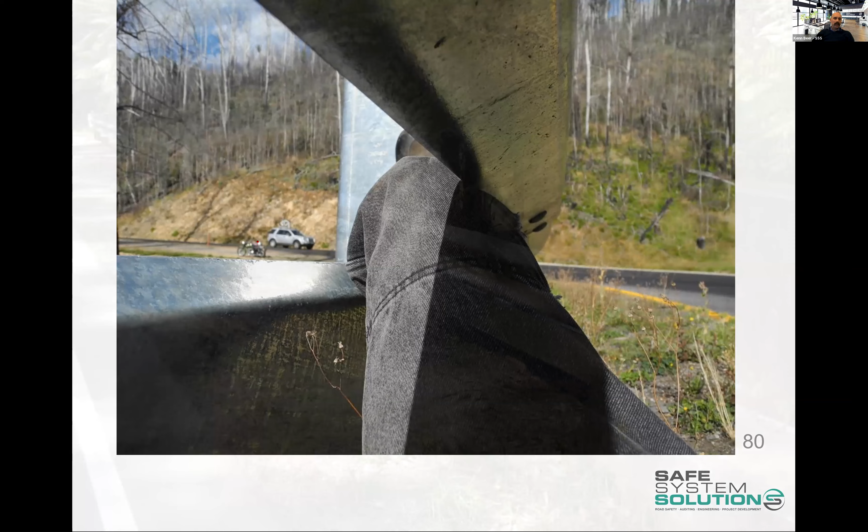Anyway, lots of examples of that. Think about the specific design. You don't want to connect your underrun directly to the post because you lose all your absorption, and there's enough room there for a leg or an arm to get through, and that's enough. If there's space, it probably will go through and be ripped off or the like. And think about that into different hazards or gaps and trying to rectify those.

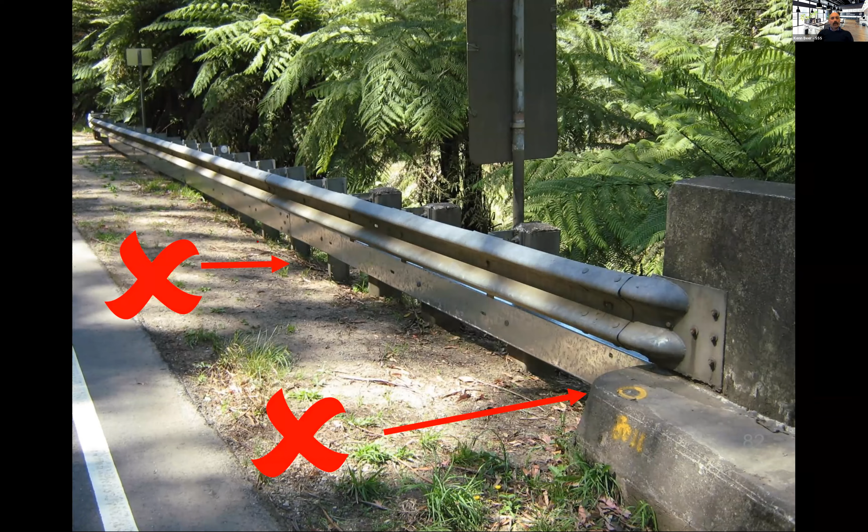And we can influence rider speed in a whole variety of ways, similar to other vehicles. Chevron alignment markers, very good. Advance warning signs, curve warning signs, and the like, all very helpful and useful. Consistency is key. No surprises for a rider through a route.

And motorcycle audits are a good possible thing. And I mentioned there Duncan, who we've utilised a lot. So the experienced riders out the front, they could be a road safety auditor or don't necessarily need to be, but they're providing the commentary. This is what I feel as a rider. This is what I saw. And then the audit team works with the rider.

So I'm going to stop there probably. I have a bit more to talk about, but that's probably about it. But I need to show you what you have to do now. So now, Emma, do you have Moodle up and running? I do. I'll just share my screen with everybody. There we go. Great. Yep, we can see that.

So in there, in Moodle, you've got your design. So you find your name and you download your design. You are auditing the design. Remember, you're auditing it as though they build it exactly as it's designed. What issues is it creating and what issues remain? Now, can you click on that audit template, the Word document at the top, please? Top of the list. Yeah, I should. Oh, hang on.

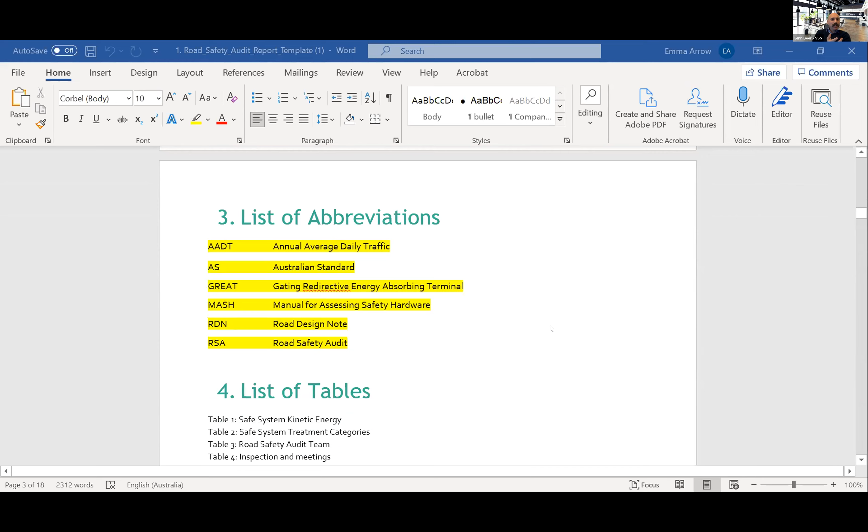So the title, there, you're all going to be doing concept design, preliminary design stage audits. You put your name in. Nobody will review it, so you can probably just review it yourself. You can delete that or put yourself. Now, keep going down a little bit, please, Emma. You write yourself a bit of an executive summary. You'll probably do that at the end. And keep going down a bit. Update your table of contents just by right-clicking and going update. Any abbreviations you've used, keep going down, please.

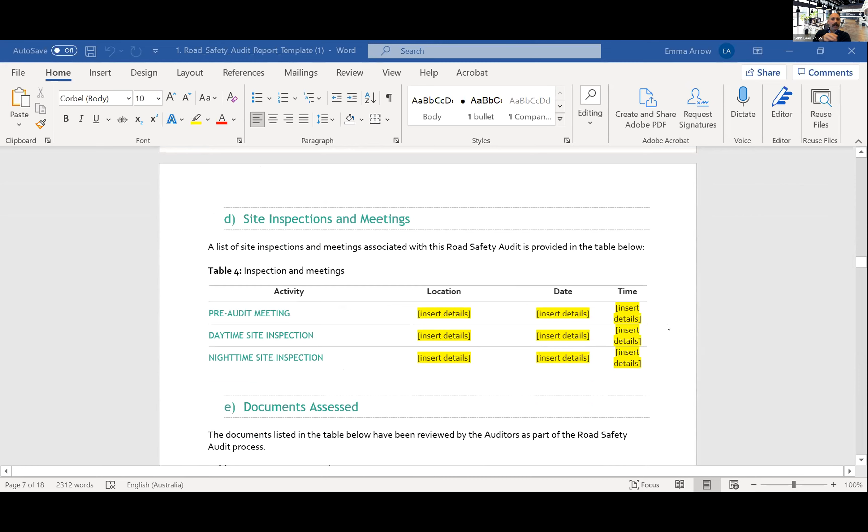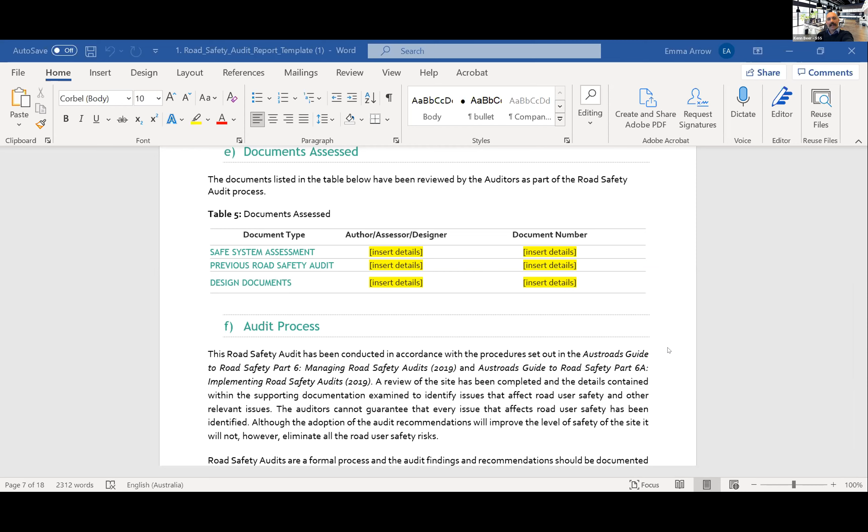All of that's background info. You don't need to update that. You need to put your name in there. You need to put in any information about your inspections when you went out there. You're not going to do a nighttime inspection, just a daytime. Any documents you got, if it's supplied by Safe System Solutions, or if it had a number in there, tell us what you got. If you didn't get some of this, which you won't have, you just write none. Keep going down.

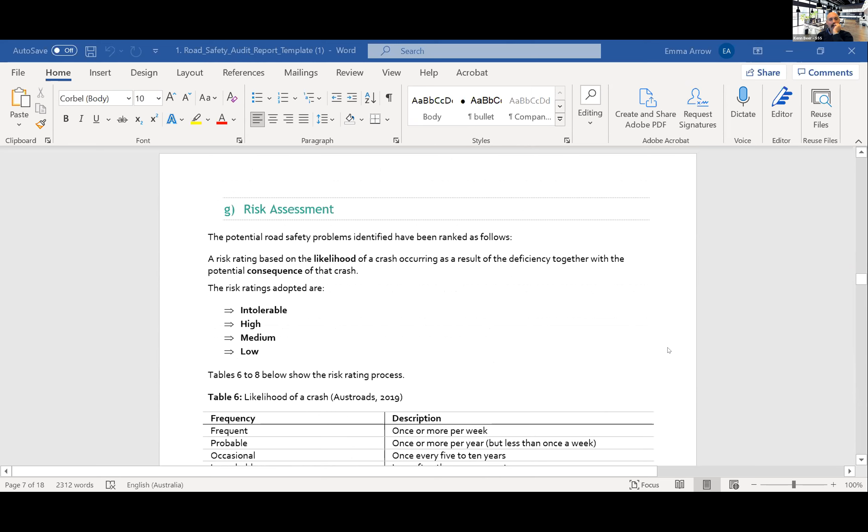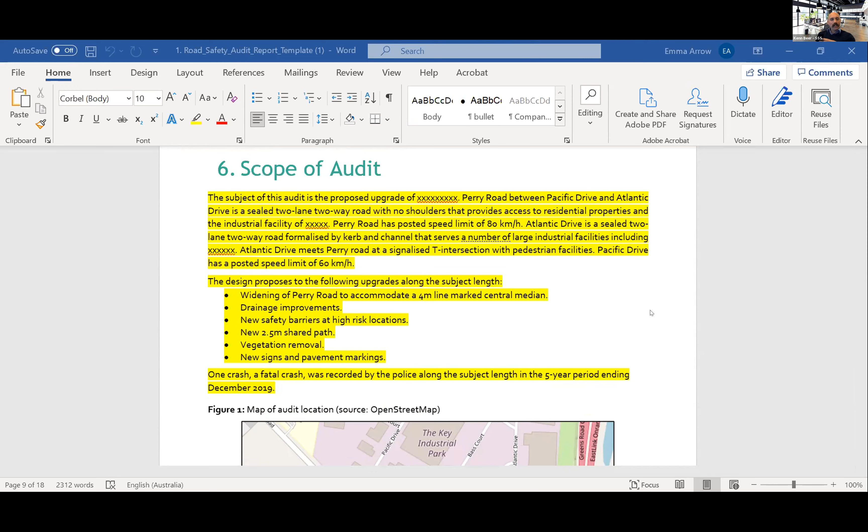So your information about how to risk rate things. You're going to tell us a little bit about the audit you're doing. This is the road. This is what they're doing. General little bit of information. Doesn't need to be too lengthy, just a little bit of a snapshot, snip of a map of the site. And then you're into the table. All right. Now, I want 3 audit findings. If you absolutely want to do more than 3, you can go to 5, no more than 5. Minimum is 3. You don't get any more marks by doing more than 3, okay? In fact, you're just more chance of losing marks by doing more. But if you really want to do more, you can go to 5.

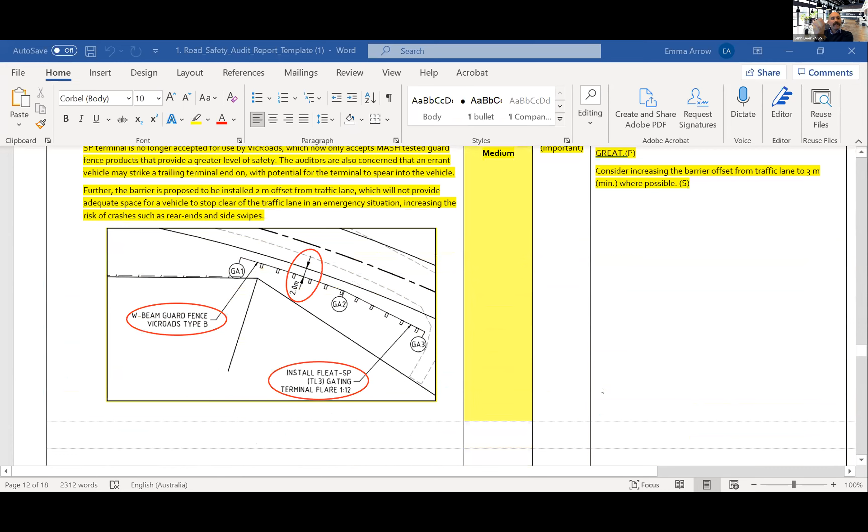3 audit findings. And you write it out, you put a snip from the design if you want, you risk rate it, Safe System energy, recommendations, categorize. You've got some example ones in there. You delete those, you write yours in. So go down a bit, please, Emma, a little bit further. So you're going to do 3 of those. And therefore the design, so when it's built, these issues are going to remain, or these issues you've created. Yep, and down a little bit further. And you sign it. You always sign your audits, okay? You sign it, yep, there we go, sign.

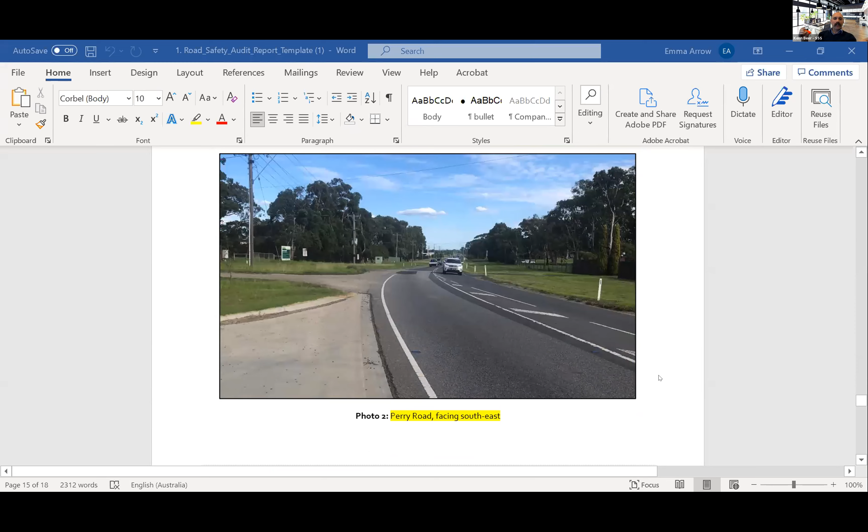And the last thing you're going to do is you're going to put a photo of yourself at the site, a selfie. So we know you actually went to the site, okay? You don't need to put lots of site photos in. You can put 1 or 2 if you want, but we really just need to see you at the site. But we've given you sort of a whole template. You could do a whole audit based off this if you wanted.

When you go to your site, you have to stress the safety, right? You don't need to measure lane widths. You don't need to put your head down and look at the road and these sorts of things. No, it needs to be a selfie. We need to see you in the photo, right? You can take it from a distance, but we want to see you in the photo at the site.

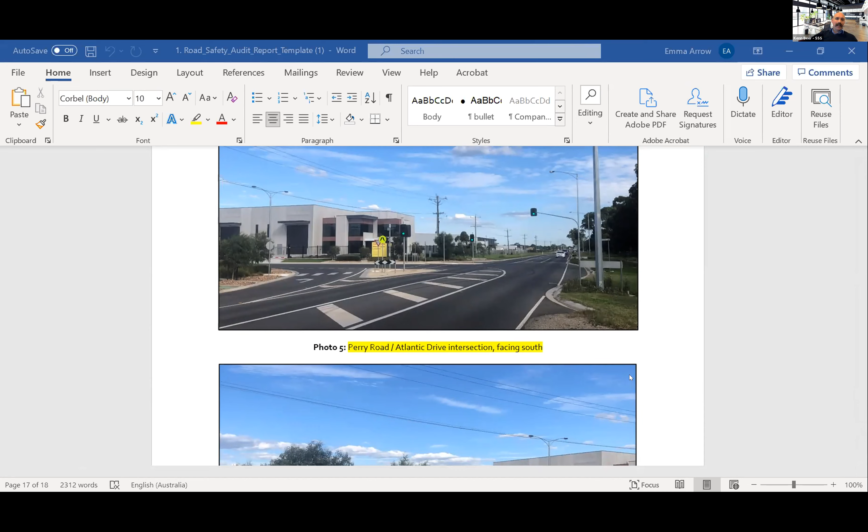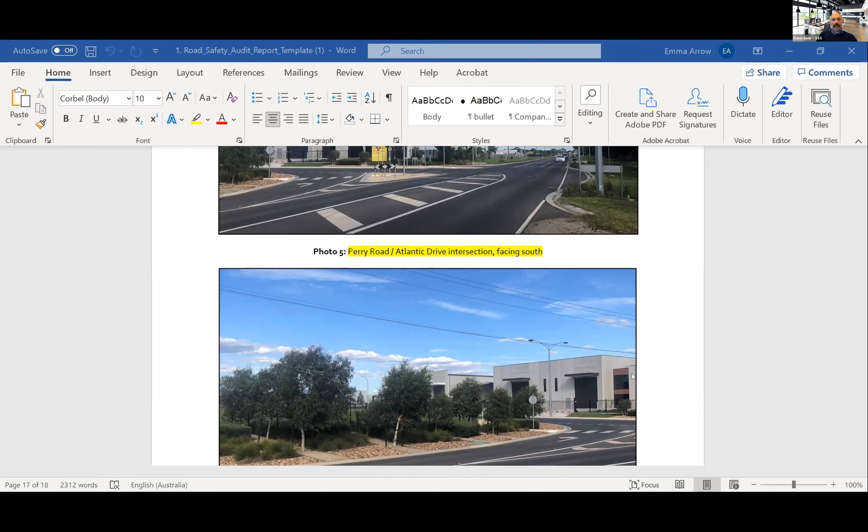We need you to be safe out there. Park safely. Don't be a hazard. If you wear your high-vis safety vest, you've got a safe work method statement in there that you're going to have to agree that you've had a look at. So if we go back to Moodle, I think the quiz is really just saying, are you going to be safe on site? You're not going to go out on site intoxicated and the like. So we want you to follow that.

Be safe. If you have any concerns about safety at the site, when you look at it, maybe on Street View, have a look first, and then you go, okay, I'm going to go out there, I'm going to park in this safe area. I'm going to just have a look at how it operates, how everything goes, or I'm going to have a drive through. If you've got any concerns, get in contact with us. We certainly don't want you doing anything that you believe is unsafe. Emma, can we just jump back to Moodle, please?

Now, Duncan has his hand up. I think that may be a lingering hand up, is it? Oh, yes, it is. Yep, I was just poised, ready in case you wanted to say something else. I'll just share screen.

So you've got a bit of time to do this audit. I think we've given you almost 2 weeks, but go back one. Yeah, we'll just go back a little bit, because if you go down to module 5, there we go. You've got your safe work method statement and you've got an agreement. So I want you to read that, make sure you're following it. It just basically says, I'm not going to go out there drunk, and I'm not going to be a hazard. I'm going to take safety into my own hands as well, so go through that.